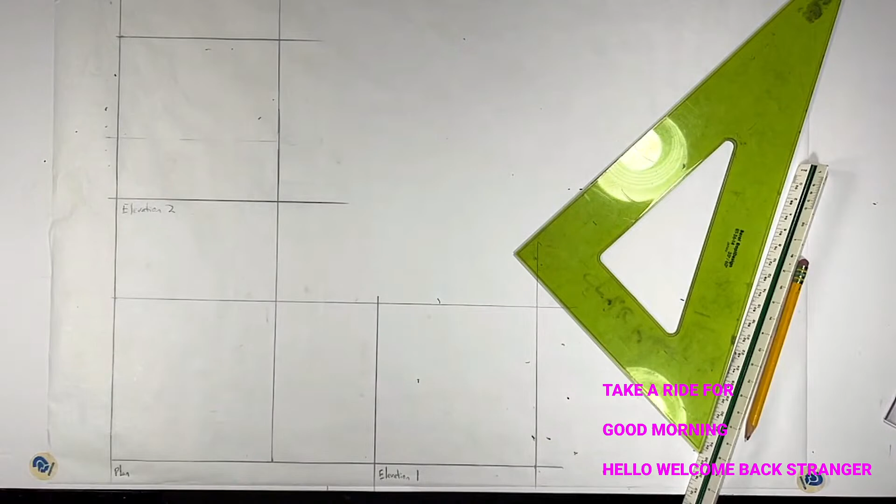So today are you giving some sort of a demo on drawings? I am, yes. Okay, and Assignment 7. We pushed it off because students would be freaking out. And probably they'll be freaking out today, but we're going to keep moving forward. So I will make clear that they're to get as far as they can on the 3D oblique drawings for next week, but we'll see how it goes.

Hello, Professor. Can I get the YouTube link? Yep, that's next. I'm gonna send it out to everybody. They can watch YouTube or they can chill and watch this, or they can watch the recording later. I think some of them are working on their models as well, and the drawings. Exactly. Okay, cool. Thank you.

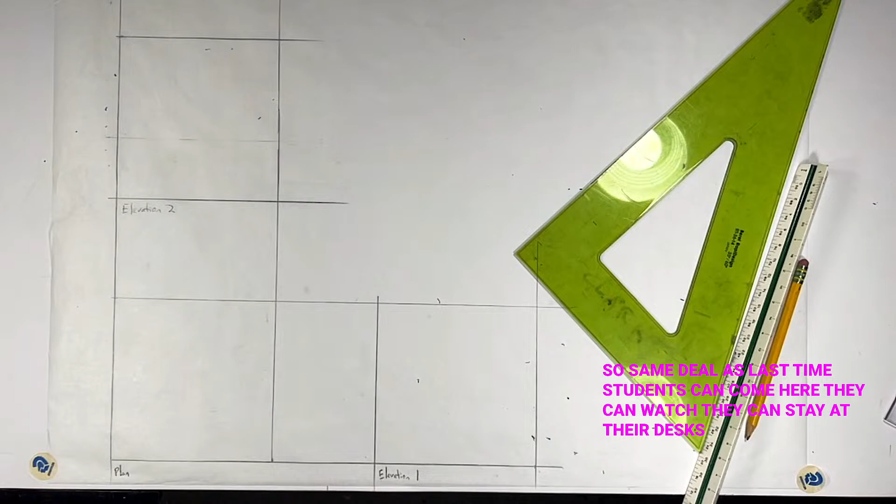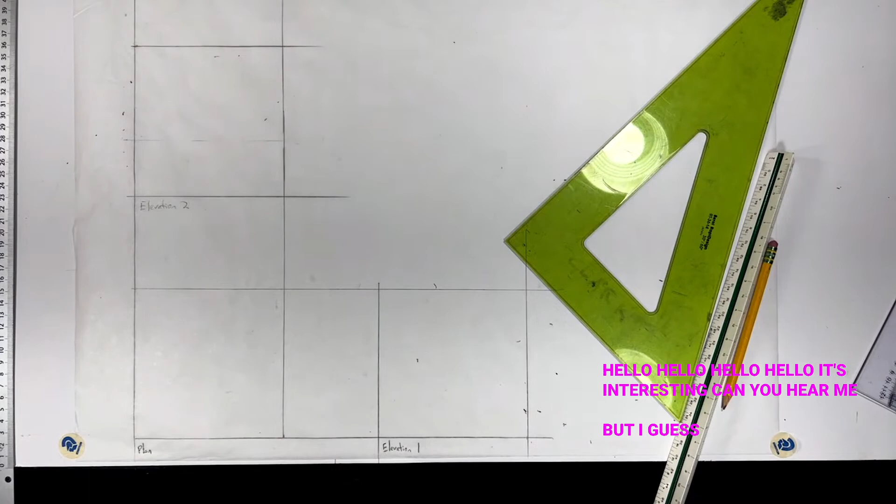Testing, testing. Hello, hello. Can you hear me? Maybe I'll get it all run as we go back. Can you hear this? Does that make sound? Hello, hello. Testing, testing. We should have sound. Yeah? Cool. Start recording. All right.

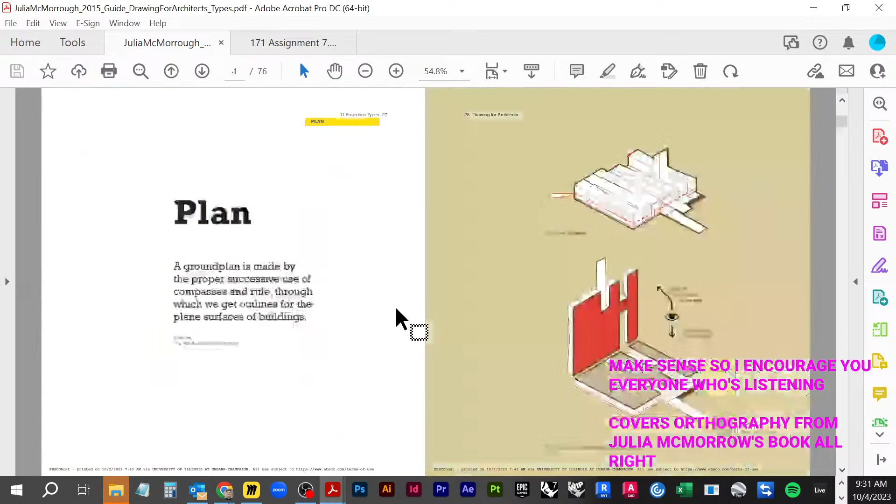It starts with plans, and she's got these beautiful diagrams that may be better than my drawings that explain this stuff. She's got examples of different types of plans, different types of sections, and then elevation, looking at the side of the building. And if you keep going, you'll hit axonometric. For assignment 7, we're going to make a 3D view. There are different types of 3D views. If you look at the assignment on the last page, Wikipedia has a beautiful diagram that explains the different types of graphical projections. This is a short list. There's many more, but these are the main ones designers and architects use.

We've already covered a bunch of these, right? First angle and third angle, like plan and elevation. We've talked about perspective a little when we were sketching. And then you've got axonometric and oblique, the ones that look 3D. These two terms are used interchangeably, depending who you talk to. A lot of people say anything that looks 3D is an axon. By definition, they're all under the parallel category of drawings, parallel versus perspective drawings. But there's a difference between axons and obliques. I usually use the terms interchangeably, and outside of this room they will be, but we should understand the difference.

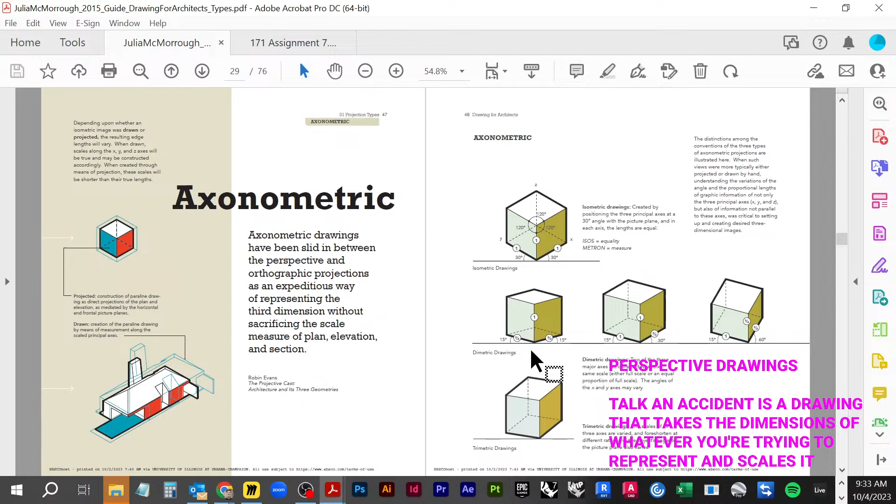An axonometric is a drawing that takes the dimensions of whatever you're representing and scales it, so we can still measure off it. That's the beauty of these drawings, just like a plan or a section, where we can measure with our ruler or our graphic scale. Can I ask someone to reach in the sharing table and give me a white triangular graphic scale ruler? Bottom left there should be a couple. But anyway, axons we can measure, and we can use the scales to get a ratio of how big things are.

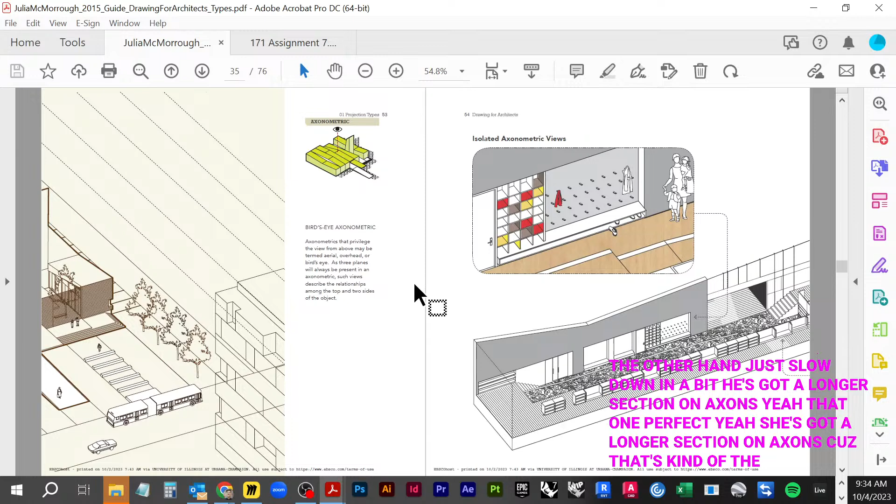Obliques, on the other hand, we'll scroll down a little. Yeah, that one. Perfect. She's got a longer section on axons because that's the terminology people normally use. But if you go down to obliques, this is actually what we're going to be drawing. The main difference is that with an oblique, we can take our plan drawing, rotate it, trace over it, and then use our elevation drawings to draw the heights. So we're going to project the height up. Axons are kind of weird.

Kind of hard to see. The top one is isometric, so that's kind of the main one we use. And I don't know if in your kit they gave you a 30-60 triangle? Probably not. I think I told you guys you only have these adjustable triangles. So with adjustable triangles, we can get 30, we can get 60, we can get all sorts of different

angles with it. But you'll see these a lot, 30-60 triangles, and the reason they exist is the 30-60 is what allows you to create an isometric drawing, right? Like kind of a standard centered isometric drawing. And this will make more sense in a second. The second line, we have dimetric drawings and then trimetric drawings.

It basically means that we can take our base drawing, or this angle we have, and we can change the angle in random ways. And there's different ratios of proportion between the x and the y of our model and the z of the height. So those things will be at different proportions depending on which face you're trying to privilege. So there's lots of reasons that you might make as a designer for choosing the angles and proportions of the 3D drawing that you do.

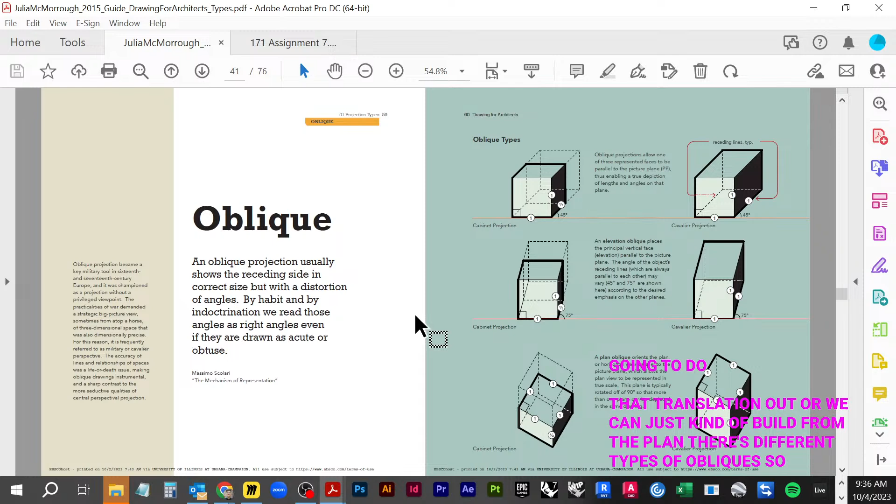We're gonna do oblique drawings, which takes a little bit of that translation out. We can just kind of build from the plan. There's different types of obliques: cabinets, cavaliers, plan obliques, section obliques. If we scroll down a little bit, Julia's wonderful book has some great examples. This is a plan oblique, so you have a plan, and then you see the lines go off at a 45 degree, the height of things.

So it's totally kind of weird to look at first, but the more you look at axons and obliques, the easier it is for you to be able to read them. The most standard one that we're going to do, and I put this diagram on our, so this one, is a 45 degree plan oblique. So we're going to take our plan, rotate it 45 degrees, and use this thing just kind of locked in this main position.

But going forward, in my third year studio, we're doing things like this, trans obliques they call it. This is a plan drawing where we see the elevation. So it's not rotated 45, it's just a straight up plan. And then we take the elevation and lay it over the top and then layer things in back. So I can only see the front of this building, I can't see the sides. So by choosing the orientation of your oblique, you can eliminate whole aspects of your project from the rendering or show lots of aspects of the rendering.

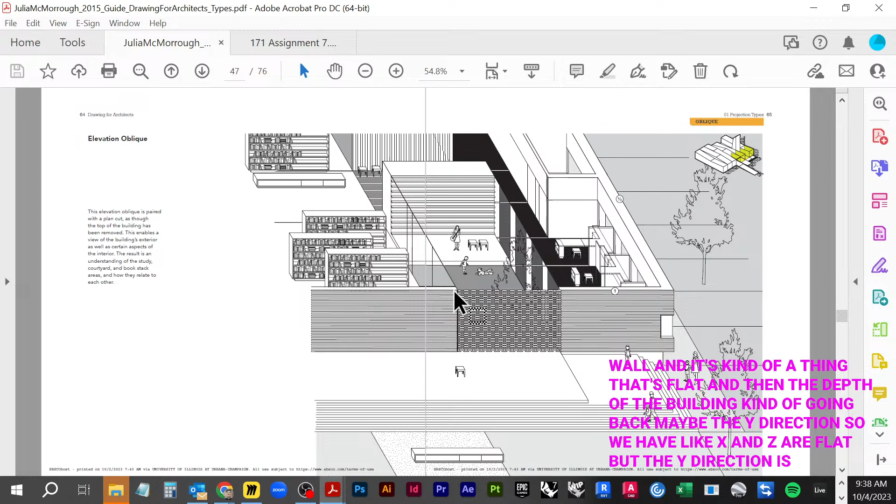This is an elevation oblique, so it's privileging this screen wall. That's the thing that's flat, and then the depth of the building going back in the Y direction. So we have X and Z flat, but the Y direction is off at an angle, as opposed to this one where the X and Y are flat, but the Z goes up at an angle. So anyway, I also left in perspective, so you can look through this chapter on perspective.

But let's talk about how to do this. I'm not going to read step by step through the instructions here; you guys can read that. I'm going to talk you through how to actually do it. The first step is the same as assignment 3 and assignment 5. You're going to take a model from your latest collection and draw a construction drawing. So we're going to take the top view, or the roof plan as we've been calling it, and every other piece of paper that we can see, and project it flat onto the paper, right? So it's kind of X-ray view.

The big difference between this and assignment 3 and 5 is we're going to do it at 1-to-1. So we're not going to double the size of things. Maybe after you try the first one, if you want to do a big axon or a big plan oblique, you can make it 2-to-1, but for the sake of time and ink and paper cost and your sanity, we're going to keep it a little bit smaller for this one.

So if you're smart, you'll figure out you can just measure real quick and lay it out. I'm not going to measure every single one, but this is where you would get your ruler out and measure the piece of paper. And go back to this thing. So you measured it, we're going to do your projection.

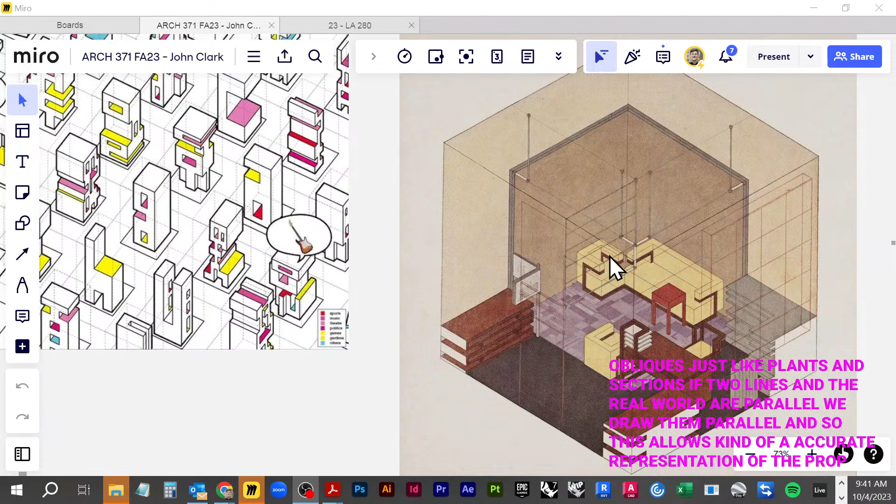All the lines are parallel, and this is really easy to see, right? On obliques, just like plans and sections, if two lines in the real world are parallel, we draw them parallel. And so this allows an accurate representation of the proportions of things to other things. This one has got some basic textures. It's heavy on the color, but what I'm asking you to do with the plans and sections, where we add texture onto different surfaces, you're going to do the same thing in 3D once we get there.

Anyway, I've got a bunch of these. People like to sketch in axon or in oblique quite a bit. It's a great habit to get into, I think, to learn to see the world as little axonometric sketches, because you can describe three surfaces or a lot of surfaces really quickly. And even people who aren't trained as architects can still read a drawing like this, maybe.

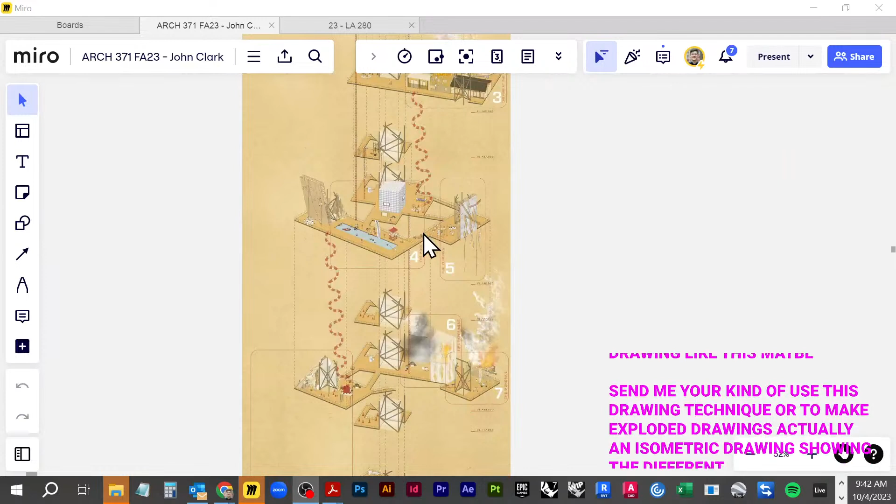Often you'll use this drawing technique to make exploded drawings. So this would be an exploded, actually an isometric drawing, showing the different parts of this construction exploded up with little dotted lines that show how they're connected. And this one has little words. I don't remember what this was, but it's a long banner, a really big one.

We will get into the computer and start to think about how to make digital axonometrics, à la this one, which maybe show a landscape or a city or a world that keeps going. One way to say it is a bird's eye view, but again, everything is parallel. Birds have eyes just like humans, so birds see in perspective. So the big thing is to understand we're not drawing perspective. Nothing converges. This is an abstraction of our lived reality. It's like if we were on a space station with a long telephoto lens, almost eliminating perspective and zooming in on a city or something.

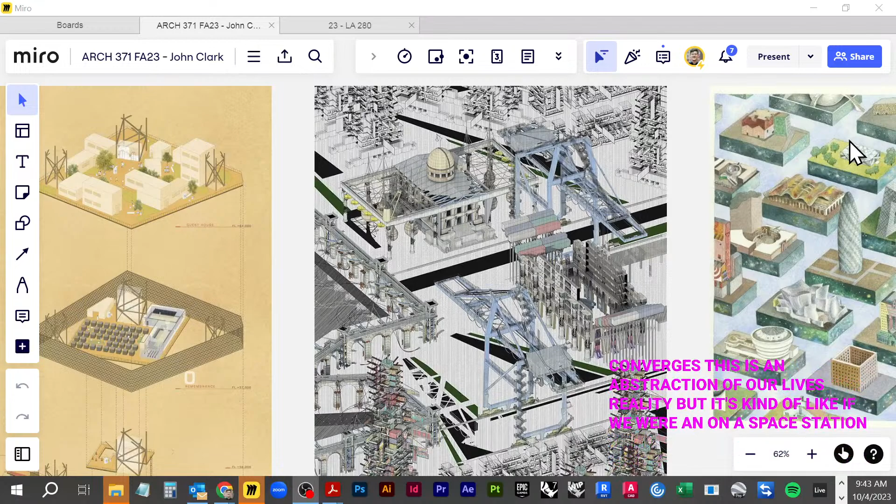Another famous axon by Madelon Vriesendorp. She's an artist who partners with Rem Koolhaas of OMA, and she did a lot of the paintings and images that made their firm really famous. This is City of the Captive Globe, this little allegory of different architectures from around the world in this ideal city. Anyway, I've got a ton of these. We can look at them all day. I will post these up, maybe in Google Drive, and take a look.

I'm gonna get going on this. Okay, so step one is to measure your paper and translate it onto the paper, one-to-one. This model I made, I have a different grid, kind of messed up the grid a little bit. So you're gonna want to choose which way you're gonna look at the drawing at the end. I have it set up where you have a plan and then two elevations. So that way you can project one elevation, and then project the other elevation right above it. You could draw four elevations and then choose, but I would say spin the model around and pick a view.

Kind of what we're doing is we're rotating 45 degrees up from the corner and like 45 degrees from straight. And you can kind of see if you rotate it around, some views are going to be more interesting, or some views are going to show more information. Other views won't. This one, I can see into this little square. I can kind of see these layers kind of going up behind.

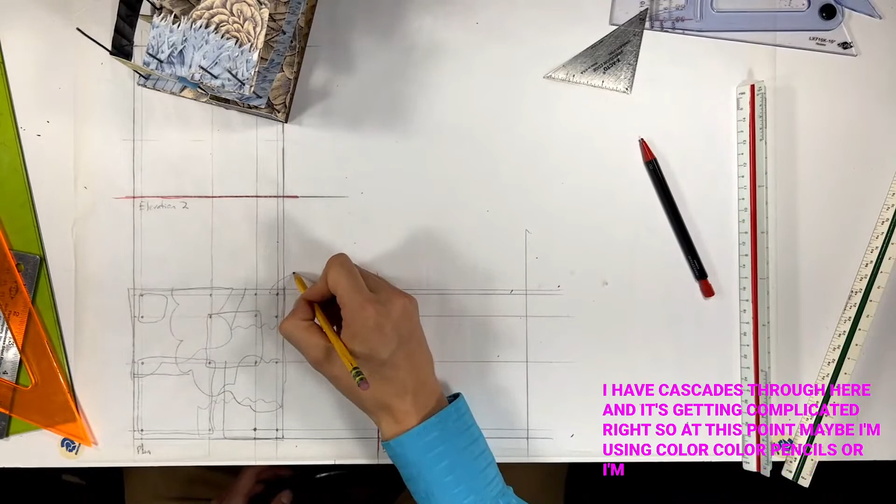This flower kind of cascades through here. And it's getting complicated, right? So at this point, maybe I'm using color pencils, or I'm saying 1, 2, 3, like making yourself some sort of notations. There's another box down here. There is another flower. And the base part, these couple of pieces of paper down here, I'm not going to worry about just yet. Okay, so I did that in a couple minutes.

You might take a few more minutes to measure it and be accurate. Same rules apply. Be as accurate as you can. The more accurate you are, the better the drawing, the better your skills of translating the 3D world into the 2D world. That will serve you well in the future. But don't kill yourself. At some point, you need to finish the drawing. So 100% perfection is not going to be the way to do it. 100% perfection means you'll be here forever.

Okay, so I'm going to draw. I've got my plan, and I'm going to draw the elevation. So looking at this side, kind of projected down. I could use the same trick where I have a T-square and my lines that I can project, little pieces of information, but I'm just gonna freestyle it. Got flower, I've got box, and maybe I should measure a few of these. It's pretty good.

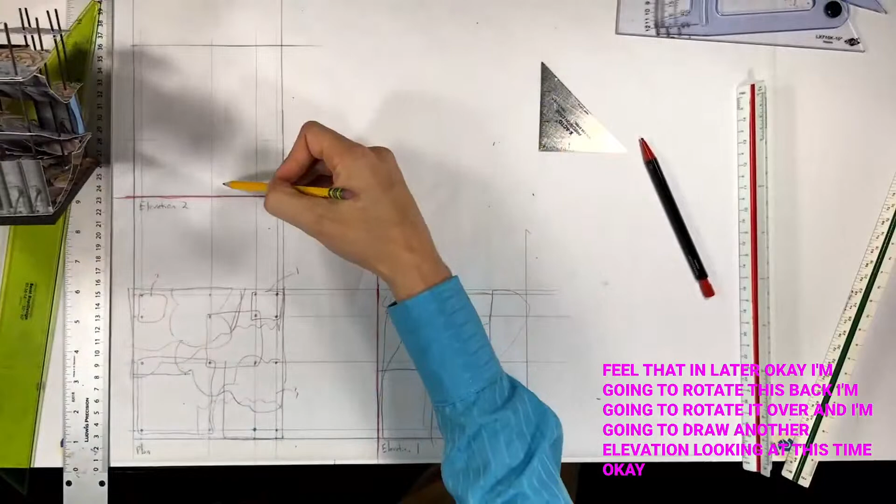There's a wall, there is a box, let's measure it, like 1.25 inches. There's another wall, or a floor here, there's another one here, there's some other walls, and a box, and another little box. Okay, again, did it in a minute. You'll take a few more to get that done. Okay, so I've got, let's call it a construction, X-ray, one-to-one drawings, like orthographic drawings.

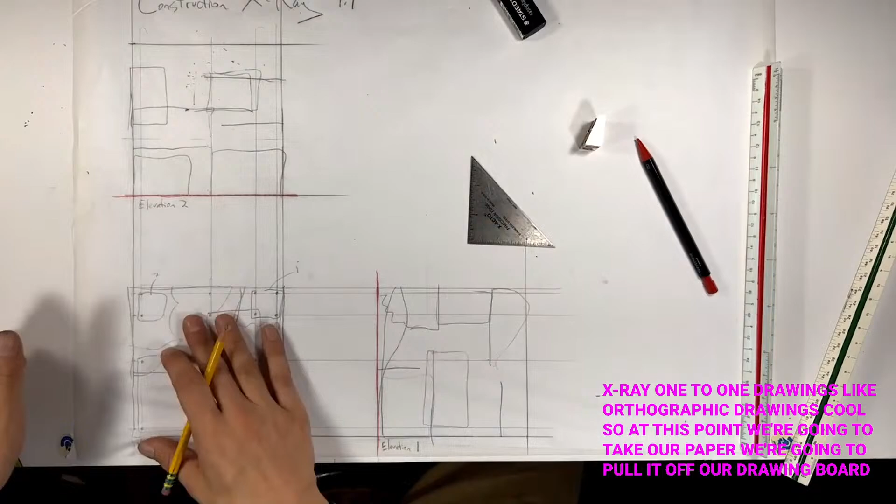Cool? So at this point, we're gonna take our paper, we're gonna pull it off our drawing board. And this is a bit long. Rotate it. Okay. So I've got my drawing taped flush to the edge of my table. I'm gonna take my T-square and my 45 adjustable triangle and lay my drawing underneath it. I'm gonna try to get my plan oriented corner to corner at a 45-degree angle. So one way to do it is just take your T-square and rotate the drawing underneath it.

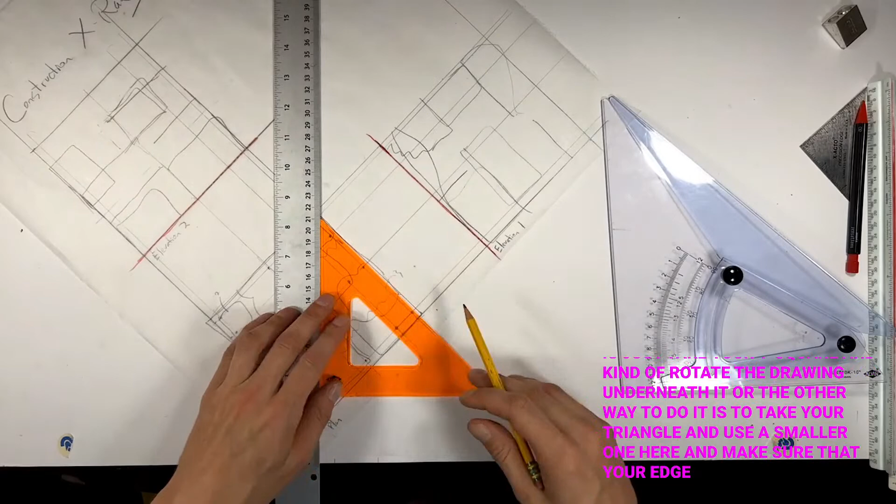Or the other way to do it is to take your triangle, I'm going to use a smaller one here, and make sure that your edge is along your 45. So take your time, get it set up. Pretty close. And then tape it down. Dots. Lots of tape. Okay, so I'm gonna double check after. Yeah, question? Oh yeah, sorry.

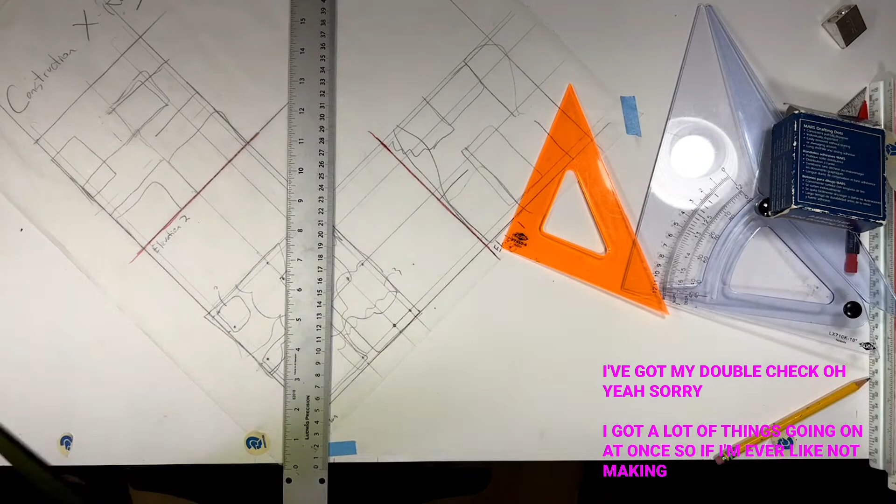I got a lot of things going on at once, so if I'm ever not making sense or something's clearly wrong, let me know. Thank you.

Okay, so we double check it. We've got your T-square flush with the edge. We've got your triangle. You can double check. Looking good. We're at 45. The first one you do, make it 45. The second one you do, if you do another one of these or you're feeling into it, change it. If you rotate it a different angle, you'll get a different result.

So rather than looking equally at the two faces and the top, which is what I'm going to see, maybe this side is more important or more interesting, so I can rotate it a little bit more that way. So this side is shallower, this side is bigger, right? Or it takes up more square footage within my drawing.

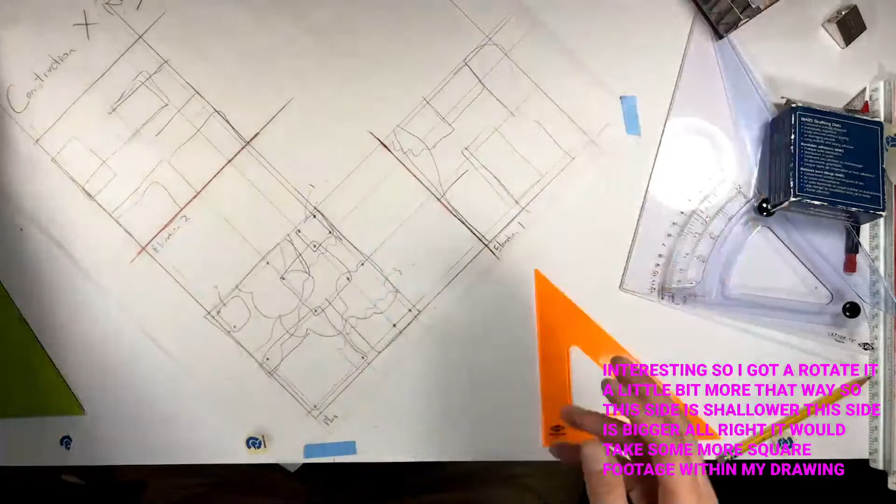Okay, take a fresh sheet of trace paper. I would lay it so it's flush with the edge of your drawing table. If anyone is making these drawings and they're finding that their desk is janky and their cutting board ain't cutting it, and I know those little Masonite boards we had you guys buy, probably not the best.

There are drafting boards over there on the cutting table. Get yourself some, or borrow one while you're working on this. Or move to a different desk if your desk is too crowded or not flat. What I'm doing here, putting a piece of mat board down below, also works.

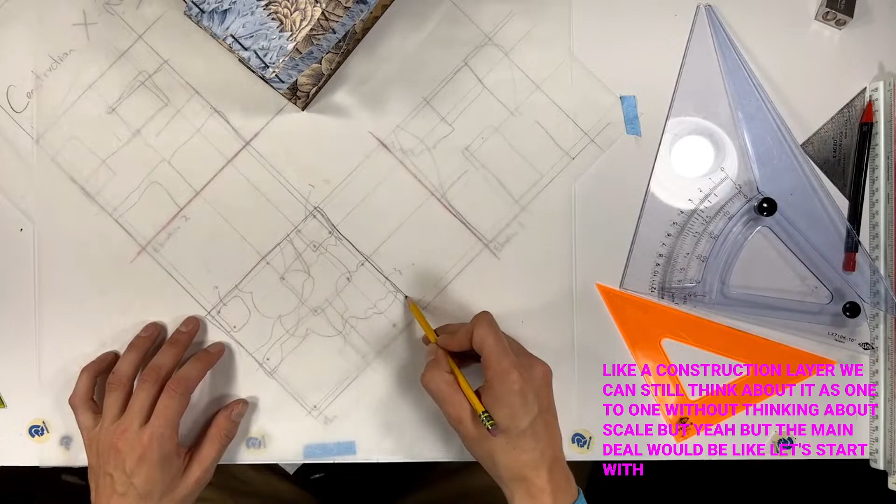Okay, so I'm gonna do this sort of quickly, just the first layer, and then we'll do another layer that'll be the inked, more careful final one. So this is again still a construction layer. We can still think about it as one-to-one without thinking about scale quite yet. But the main deal would be, let's start with our box, our base, and maybe we can start with the wires.

I've got, say, a wire here. I know how the wires are. Let's go X on one side, Y on the other, and then the wire is 5 inches, right? So I can draw a line from that wire straight up. So up 5 inches, that is the Z. You see that? It's X, Y, and Z. And those are the orientations. So Y is all that way, X is all that way, Z is always up, straight up that way.

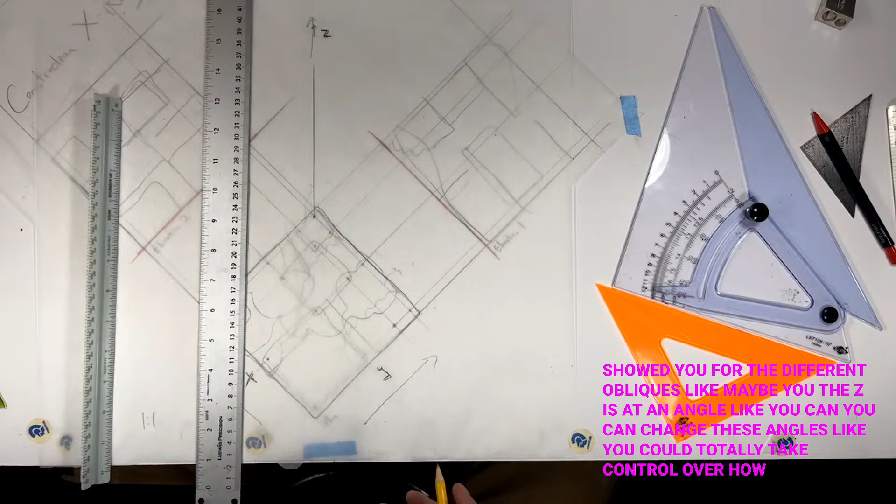And again, some of the examples that I showed you for the different obliques, maybe the Z is at an angle. You could change these angles. You could totally take control over how the geometry projects. But the main idea is to be consistent, because even if I rotated the Z off at some funny angle, as I move this around, I would keep that same angle, so my Z's are always parallel. Remember, parallel drawings, no perspective.

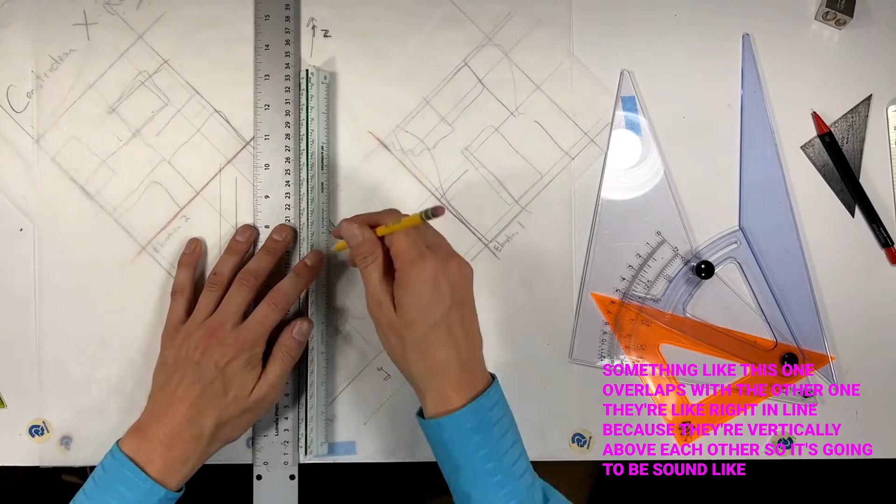Okay, so I'm gonna run through it. I'm just gonna really quickly pop some 5-inch wires on these. I'm just double checking that my T-square is flat. And we'll start to notice something: this one overlaps with the other one. They're right in line because they're vertically above each other. So there's gonna be some lines that are in plane with each other or in the same place. Make some little ticks or do them just off so that you can see.

Yeah, mechanical pencils walked away, so I'm using this guy.

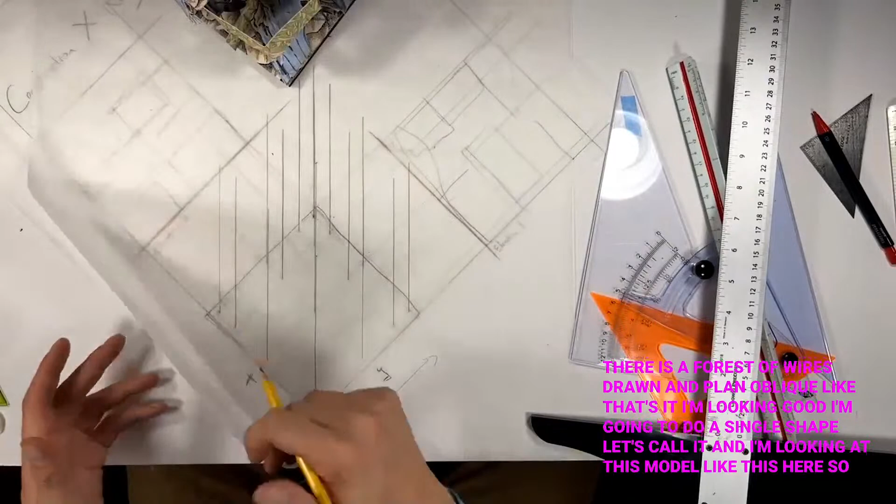Okay, there is a forest of wires drawn in plan oblique. That's it. They're looking good. I'm gonna do a single shape. I'm looking at this model like this here. So let's do, say, this leaf up top, which if I trace it, is this thing. It's relatively flat. It has a little bit of curvature as it kind of goes up.

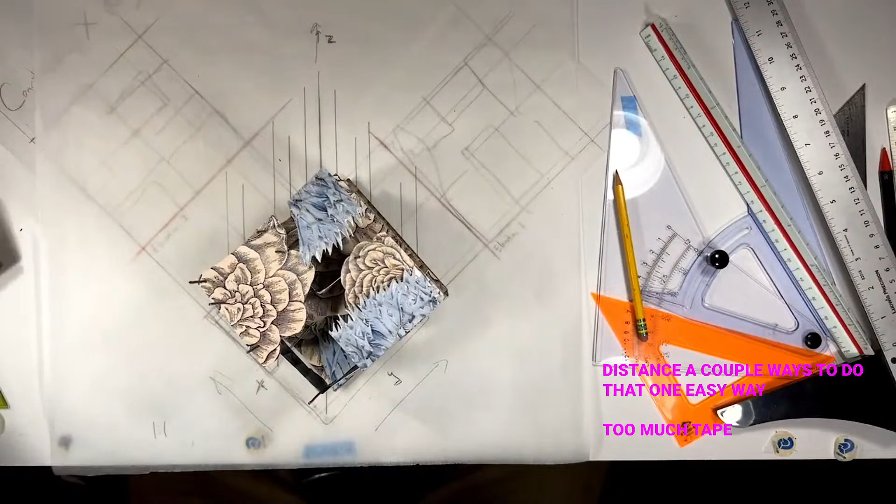So what I want to do is take that red shape and move it up, so in the Z direction, whatever distance. A couple ways to do that. One easy way, so we're using too much tape. So I can measure how high it is off the base. It is, let's call it 3 3/4.

So I can measure, say, off my wire, which starts here at the base and goes up 3 3/4. Make a little tick mark. I could take this shape and kind of eyeball it in up here, or if I'm smart, move my top drawing down so that that tick mark is where the wire is and trace that shape in plan. Do it in red.

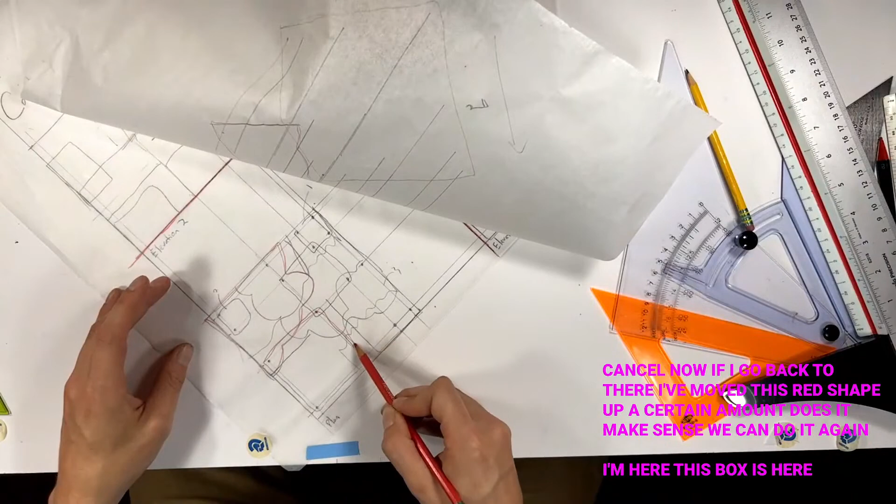Okay, so now if I go back to there, I've moved this red shape up a certain amount. Does that make sense? We can do it again. Let's do this box right here. So this box is here in plan. I'm gonna do, say, the top of the box, because that's what I'm gonna see for the most part. So I can measure how high it is off my ground. 2.5, let's say. So I know it touches this front wire, so I'm gonna measure on that wire. 2.5, make a little tick mark.

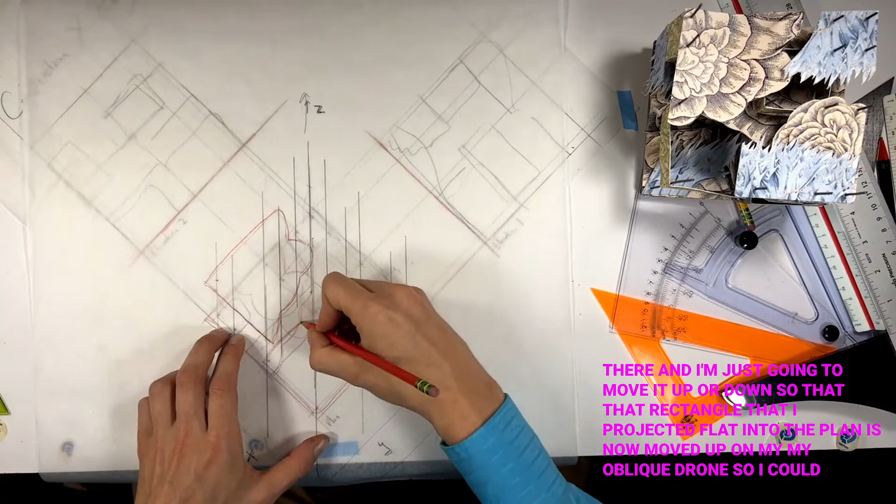So here, my outline of my base is overlapped with the outline of my base, right there. And I'm just gonna move it up or down so that that rectangle that I projected flat into the plan is now moved up on my oblique drawing. So I could do that, and then move back. Let's put a piece of paper under so it's easier to see. So that is the top of this shape that I just drew.

There's a thickness to that shape, so I can measure the thickness, 1.25 inches. And again, I can measure off a plan oblique. So I could use a ruler to show the thickness of this stuff. 1.25 inches, 1.25 inches, 1.25 inches. And I'm gonna see the front aspect of this box. Look at that. And I'm gonna see the inside of it, 1.25 inches. There. And so this is just a piece of paper drawn in 3D. I would see maybe a dotted line of how it kind of goes behind the other one eventually, right?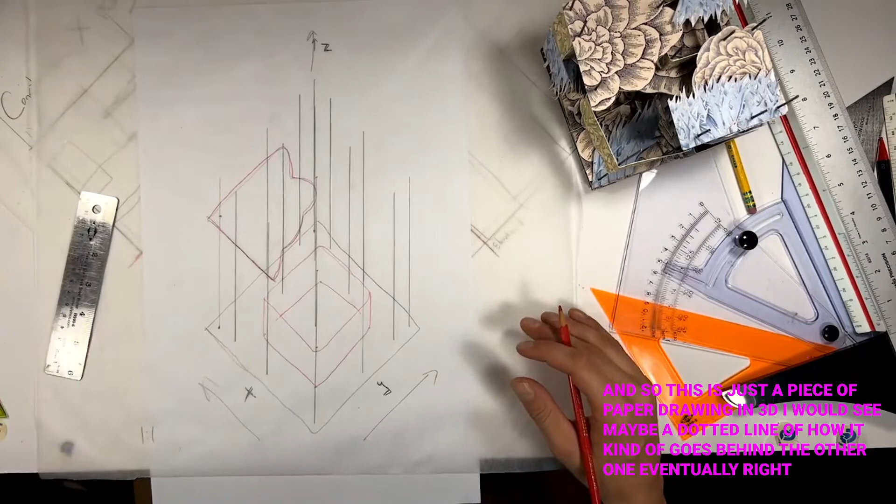Does that make sense? So there's this vertical space in between the bottom of this wire and the bottom of this paper. Vertical space in between the bottom of the wire and the bottom of the paper.

Making sense? I can't see you guys. The lights are in my eyes. You can see whether your eyes are wide or not.

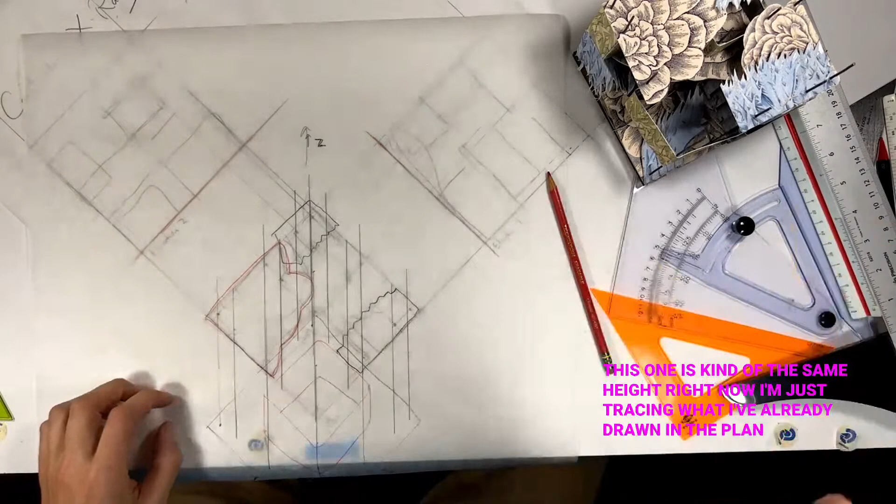Okay, so I'm going to repeat the process. Take this off. I'm going to kind of eyeball some of these in based off the same height. So I got these two zigzaggy papers. It's kind of a little bit higher than that one. This one is kind of the same height. So right now I'm just tracing what I've already drawn in the plan. I'm not making it very fern-like, but it's all good. What else? There's another box here.

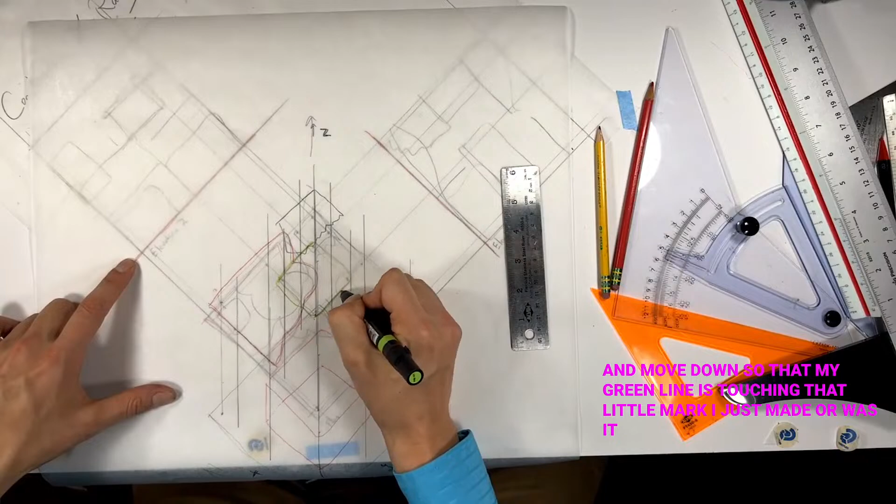So that box is sitting, let's measure it, three inches above. So this box, and again, if I'm getting confused, let's do color. What I say, 3 inches, so we can measure, find some wire. This is why wires are nice. We can kind of use them as registration marks. So I know this wire, I'm going to go up 3 inches. So there. I can move down so that my green line is touching that little mark I just made. Where was it? There it is.

Has some thickness to it, so I'm going to see the thickness. We've got this wall, so I see this wall. And this is a great example. It touches the edge. So right here, it touches, and then it goes up a certain height. So it goes up 1.5 inches. I could use my T-square, and I could measure up 1.5 inches. I'm just gonna eyeball it. This wall is an L shape. It curves in, so it wants to curve in up to where it is in plan.

I've already drawn it. We have another wall over here, which is this one. So it goes up a certain height, it goes over. We've got this box on the back side that's underneath this piece of paper, so I can just go down from the top. Goes down 1.5 inches. So it goes down from this red piece of paper and it goes over. And I want this line to be parallel to that line, but it only goes over 1 inch. I went too far. It's a box, so you can draw the whole thing in there.

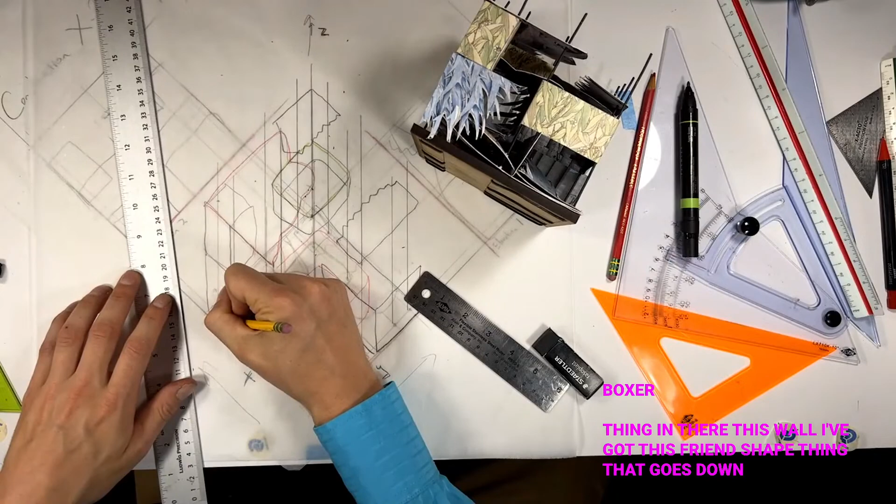This wall, I've got this fern-shaped thing that goes down underneath there. And I've got some of these sloping things that I see on this side. So just do it there and there. And these cut back somewhere. And I've got one more kind of flower or fern that is sitting in between these walls. So at a certain point, you kind of use your geometry to locate some maybe more complicated pieces of paper. This other fern sits in between, let's say it's half an inch above this wall, and it does its fern thing, kind of cuts away. There's a flower under there too.

Okay, so I got a lot of stuff on here. Right now it's kind of a hot mess. It's like a lot of lines, kind of all overlaid. I maybe have an idea in my head. Maybe at this point I'm referencing my notes, you know, like number 2 there.

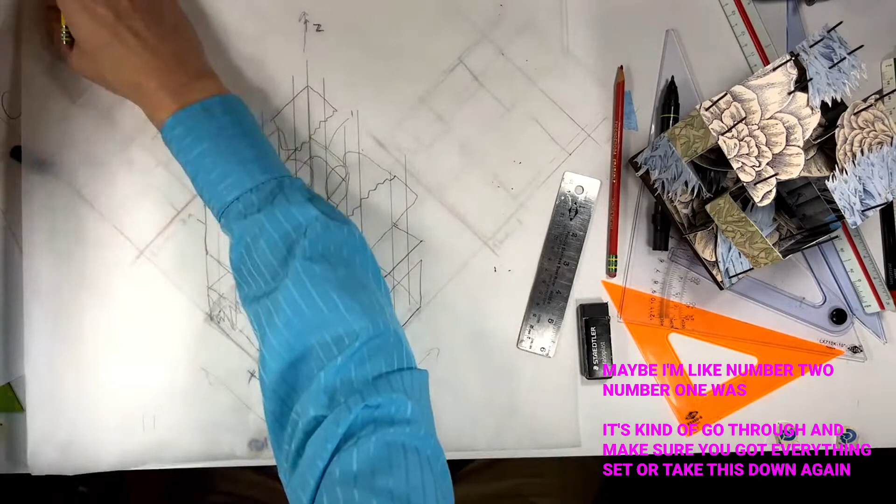Number 1 was this one. Just kind of go through and make sure you've got everything set. Or I'm gonna tape this down again. We can take a fresh sheet of paper and just do a cleaner version.

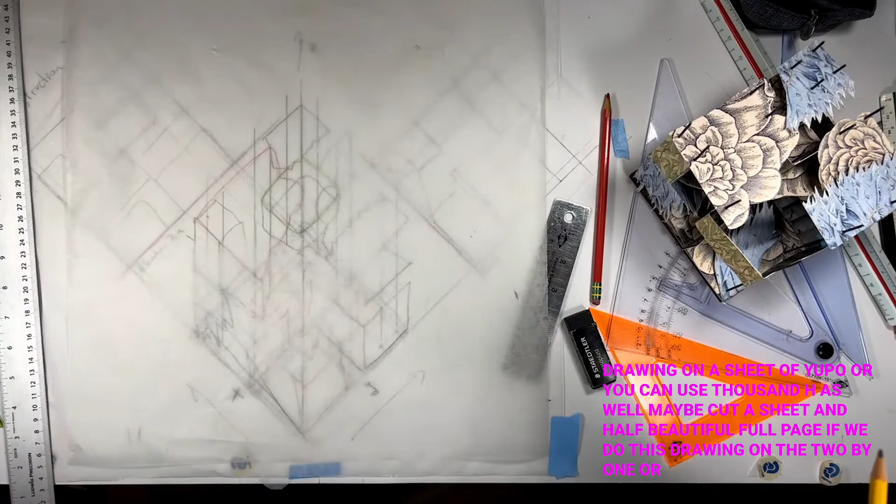Okay. Again, first one you do maybe use trace paper. I've sized this so it works on Yupo. You can fit this drawing on a sheet of Yupo, or you can use 1000H as well. Maybe cut a sheet in half. You won't need a full page. If we do this drawing on the 2:1 ratio that we've been doing the other ones, it'll take the full 17 by 22 sheet, maybe a little bit more than that.

So if we make them isometrics and kind of squish the angle a little bit, then we can fit it on a big one. But I'm not into torturing you guys, so we're gonna keep it small here. Cool. Let's get some more tape. You may think I'm into torturing you, but I'm really not.

This is a drawing type that was really popular in the 80s and 90s, and kind of went out of fashion for a little bit once computers came along. A lot of animations and hyper-realistic renderings and all that sort of stuff. But then the neo-postmodernists came along in the 2000s, like where I went to school at UIC. We started to make these again, and some of my older colleagues, Steve Wierzbowski at Trust Outfit, he's like, "You're doing axons? That's so old. That's such an old thing."

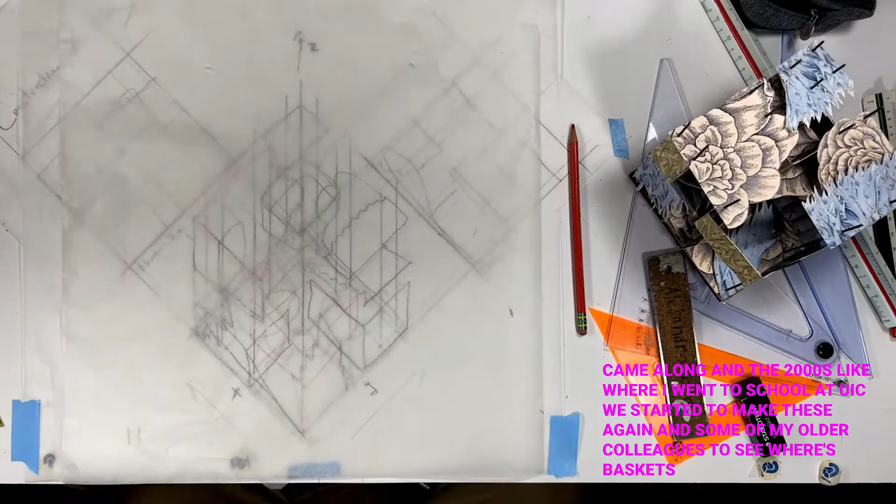So what's old becomes new, and this sort of drawing type, we're starting to see it pop up everywhere again. And I think that's not just because of style, but because it's actually really useful.

Okay, so on the fresh sheet, now what I'm going to do is try to draw these 3 faces. So 1, 2, 3. Where's the wire? 1, 2, 3, right? Top, sides. We are going to draw what we see first, and not draw the things that are behind. And we're going to start to think about thickening this geometry. So same way we did for the plans and sections.

A piece of paper is not a piece of paper. A piece of paper is like steel or concrete or board form, or wood, logs or wires that are wrapped around, or a photograph of a flower that's been imprinted into rammed earth, like literally anything. Looking through all the precedents, and through talking with us, we can help you figure out

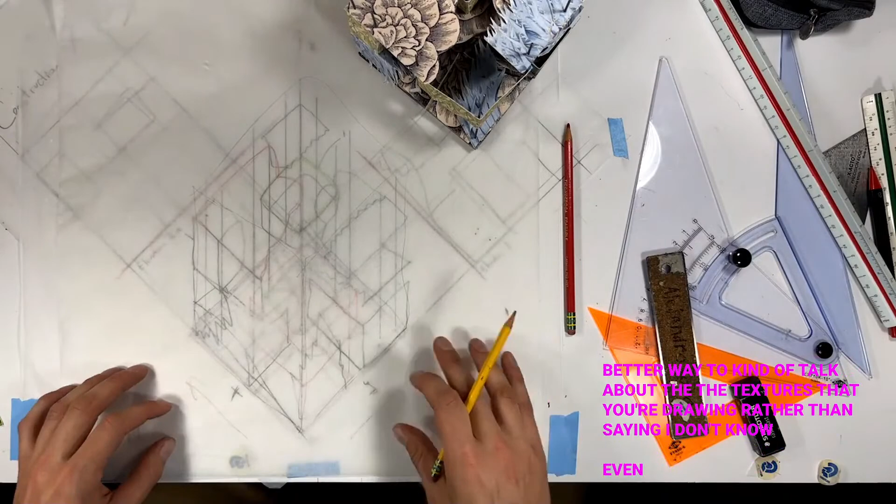material knowledge, let's say, or understand a better way to talk about the textures that you're drawing, rather than saying it's just lines or just dots. You should say it's concrete or it's wood or whatever. Use the language of architecture, even if you're not 100% sure what it is. Cool. So I'm going to start again at the top and work down.

We'll start with the first flower I did. You see most of it. That has a thickness, so I'm gonna draw a line down. I'm gonna draw the edge. At this point, we can bust out your scale again, and you can choose a scale and think about how big the people are gonna be next to your little drawing. I think 1/8 inch is great. If you guys use 1/8 inch, then the people are about yay big, sitting on there.

That's pretty cool. Half that size, so this is 1/8 inch equals 1 foot 0 inches. Chubby guy. That's 1/16 inch equals 1 foot 0 inches. Or double 1/8 to 1/4. I think 1/4 is too big. Pick one of these two. That way your little people can

inhabit your little space. So at this point, also, if you haven't started playing with these little people, you should. So that's 16th. This would be 1/8. I digress.

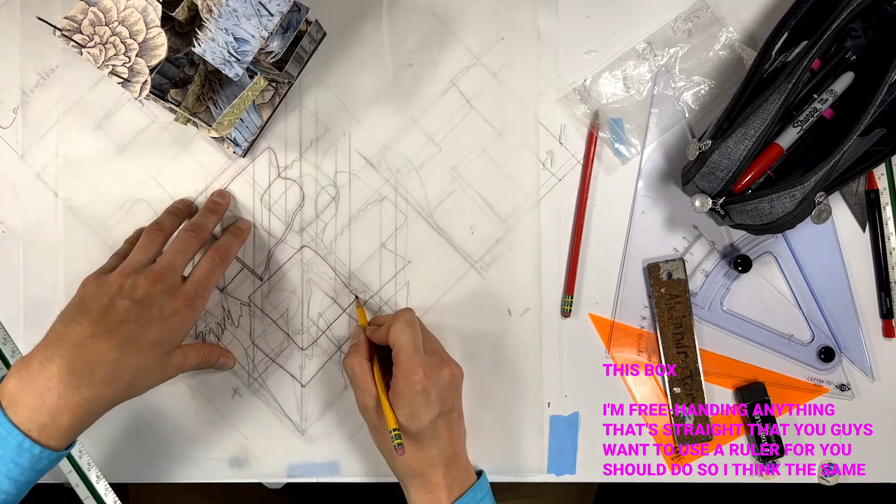I'm freehanding anything that's straight. If you guys want to use a ruler, you should do so. I think the same rules apply. A combination of ruled and freehand makes for beautiful drawings. This is this paper that kind of folds over. This is this next one.

This one, I see the bottom. I see this top guy. Put that here.

So this one kind of goes down below. I'm doing the wires last, you notice? You guys ever just doodle drop shadows onto things in your notebooks and stuff? That's basically what we're doing here. Kind of front, you want to add a drop shadow.

That's another flower. This flower is kind of facing away, so I don't see too much of the front of it or the thickness of it. I see this box kind of emerging underneath these pieces of paper. There's another flower actually that kind of goes over the front. So I would erase some of this.

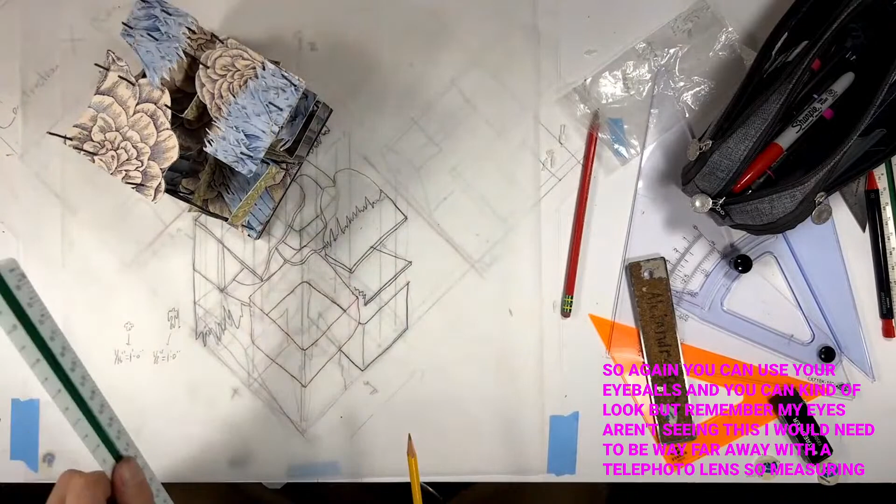See some other flowers. So again, you can use your eyeballs and you can kind of look, but remember, my eyes aren't seeing this. I would need to be way far away with a telephoto lens. So measuring and trusting the projection process that I did in the previous step, that's the way to be accurate. Using your eyeballs is a way to be expeditious with time.

Got this wall. It sort of pops through. This other wall has a thickness to it. We've got this fern thing that kind of pops through. We've got these pieces that kind of slice through the wall.

And that's kind of it. It's like what I can see. All the stuff that you guys are looking at on the backside, I can't see. So I'm not going to draw it. I could later. I could draw in like dotted lines for all this stuff, but let's just ignore it for now.

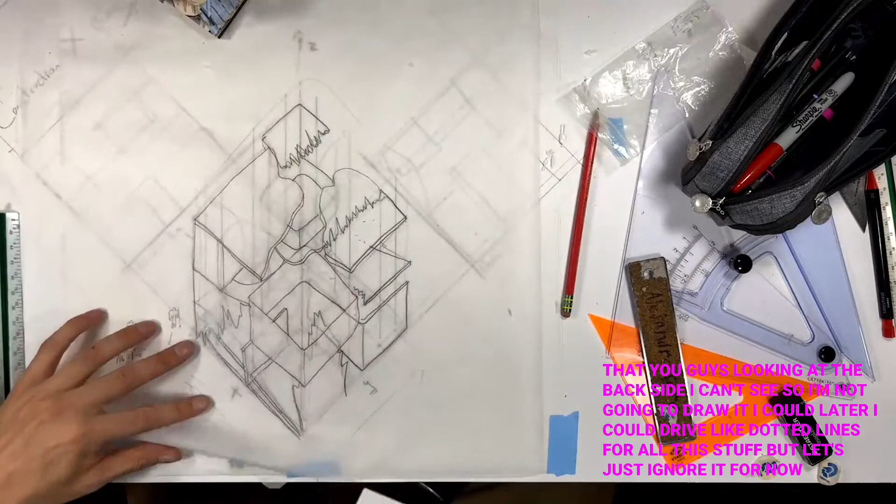Cool. So I got like the start of a 3D drawing without thinking too hard. I thought a little bit, but not too much. Trusted the process, trusted the projection. It's the same as plans and elevations and sections, just with three axes rather than two. So X, Y, and Z going up.

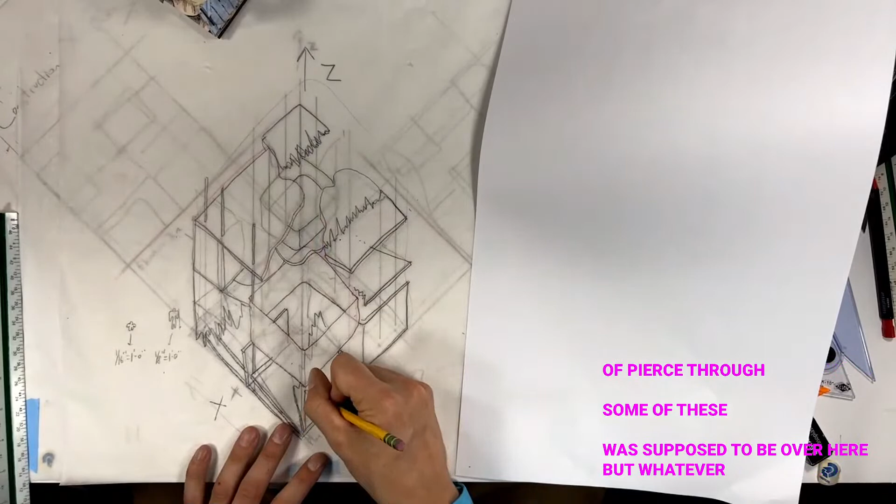Okay, so at this point, maybe I start to draw on the wires. They are sticking up. They kind of pierce through some of these. Messed up. This wall is supposed to be over here, but whatever. Forward. So drawing the little circle for the top of the wires will help differentiate them from all the other lines that are happening at this point.

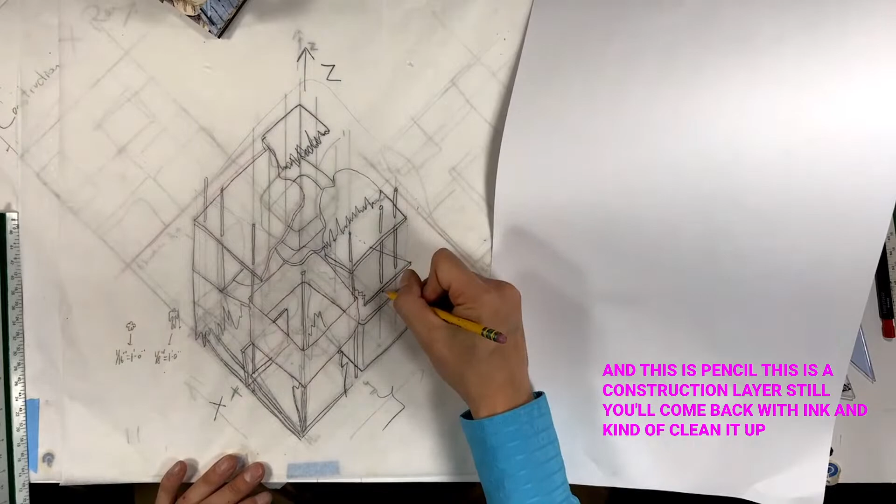Again, this is pencil, this is a construction layer still. You'll come back with ink and kind of clean it up. That one goes behind the paper. Circles for all the ones I'm trying to do here. This one actually curves up. I didn't draw the curve.

So that'll mean the wires have different depths. This one goes behind. These guys are all kind of equal. This one goes to there. Cool. Got some wires in there. I think a few more of these I would see popping through. Actually, some surfaces that I can see through there.

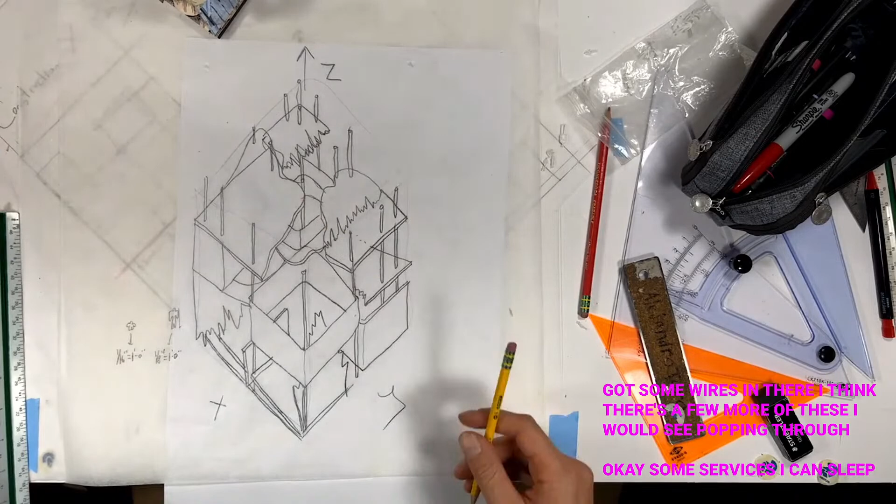So this is a one-to-one kind of translation. I'm starting to think about scale. This is where maybe we take another sheet and start to think about design. So like we've done with the plans and sections, changing it. So maybe this whole thing becomes a glass roof for whatever reason. And imagine that people go in there, or this box that I have there, I cut some archway windows.

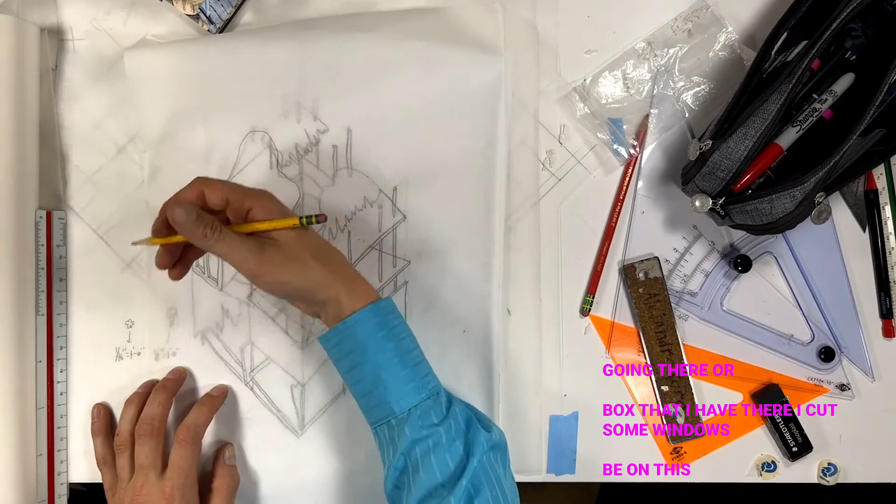Maybe on this flower ramp that goes up, I have some little tiny benches that are fern shaped. You know, adding stuff in like we've been doing for the plans and sections. Maybe between these two, again, glass, I mean, glazing walls are nice, easy things to do. This is getting dull. Because that still allows us to see through it, but adding in surfaces that don't exist in paper. We can invent as we do this.

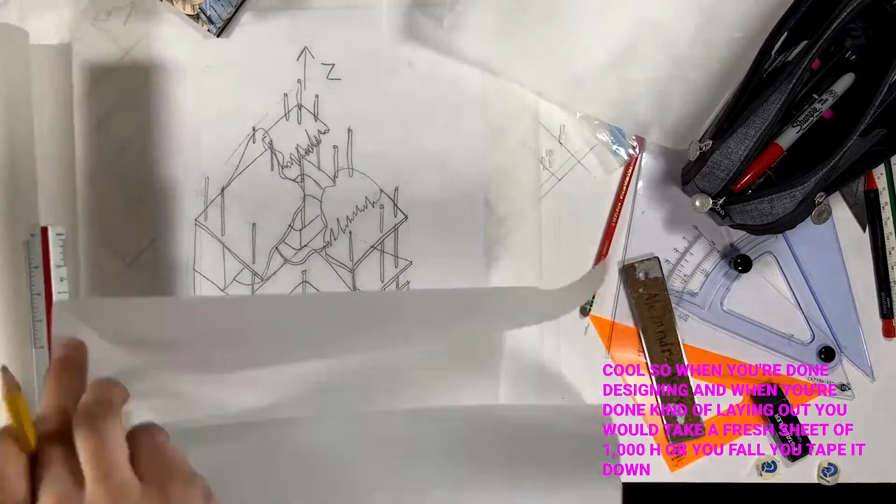Cool? So when you're done designing and when you're done laying out, you would take a fresh sheet of 1000H or UPA, tape it down and you do the inking. Same rules. There's a few other things that you might want to think about with the Axon that are a little bit different. So I won't sit here and ink the whole thing. You guys can go back to your desk and keep working. I'll finish it this evening or tomorrow or something. Then post it.

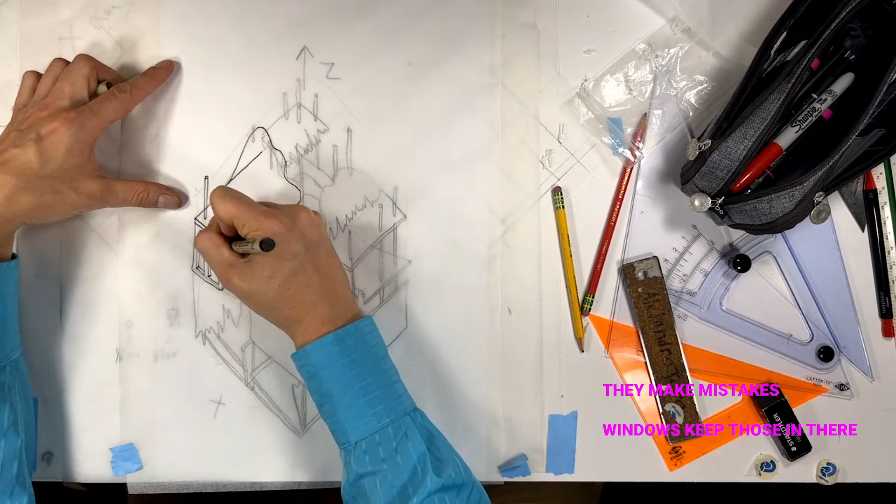I made mistakes. Like those arch windows, keep those in there. I'm just drawing with a 0.5, adding in thickness. Trying to get enough in here that I can talk about some 3D line type considerations.

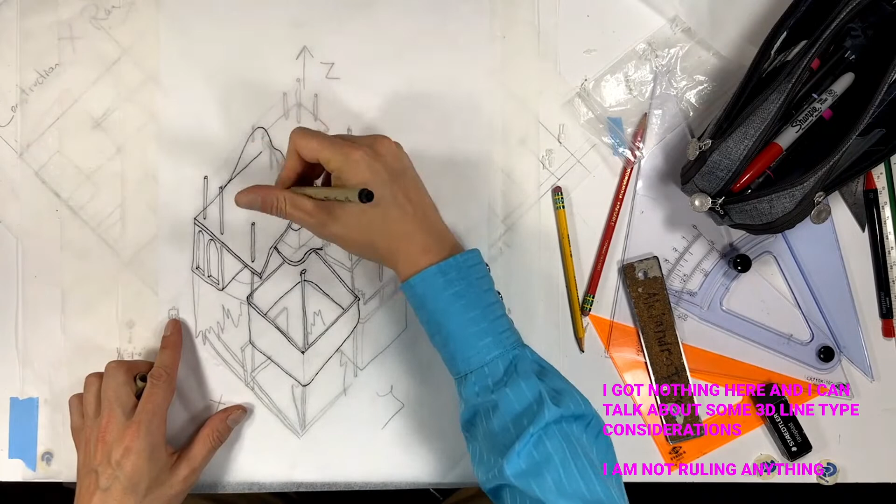Yeah, I'm not ruling anything. You guys should rule some of these. Don't make the whole thing freestyle.

All right, get in there. Wire that comes down.

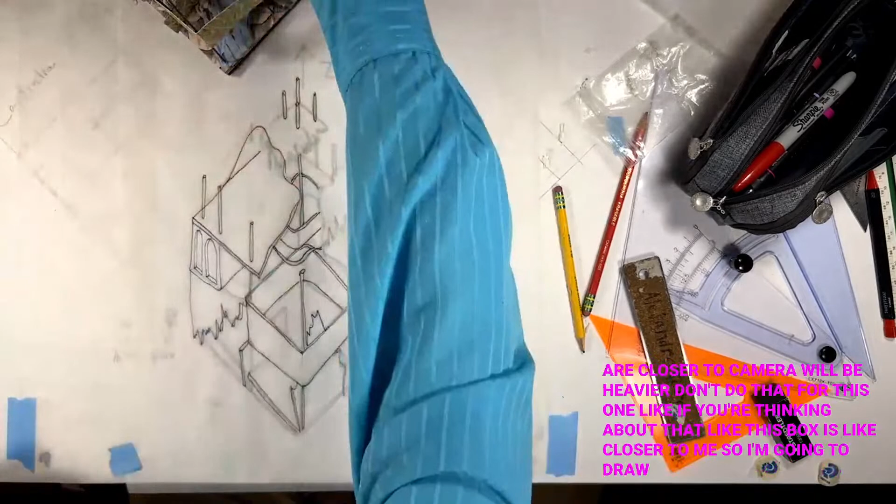Okay, so we've been spending a lot of time, especially in the plans and sections, talking about when you draw things that are far away, we're imagining that there's fog, right? And that they would be lighter, and that things that are closer to the camera would be heavier. Don't do that for this one. If you're thinking like this box is closer to me, so I'm gonna draw that really heavy, and this thing is farther away, I draw that lighter, it's just gonna start to look weird.

What you should more so think about is trying to define air or space that is in between things with graphic edges, with silhouettes. So basically having a little bit different line weights to accentuate. So here there's like air underneath this. So I want to accentuate that all of these three things are together. So I might outline

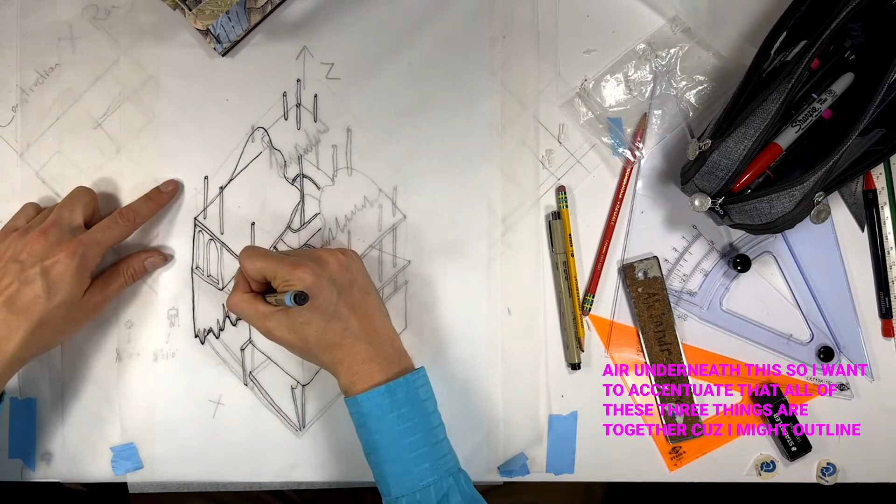and it kind of cuts back in there. Bottom of this, and then around the top. And maybe even going over these wires. And maybe these windows get a little bit of... So you can see how that kind of pops this collection of shapes which are touching each other away from, let's say, these guys on the ground.

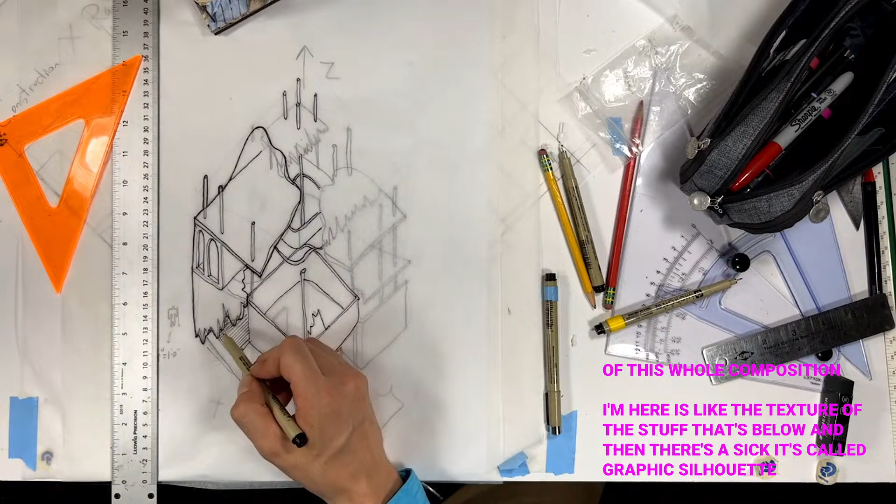And maybe I put a little texture with the thinner. Let's do it right. Emphasizing the 45 will emphasize the obliqueness of this whole composition. Whatever I'm drawing here is like the texture of the stuff that's below. And then there's this thick, let's call it graphic silhouette that separates that from this, which allows me to read it as being distinctly removed.

Maybe there's some kind of speckled texture on there. This guy curves up, so I can think about drawing maybe some contour lines. Contour lines like topographic lines, so imagining slicing vertically through this thing to show that it's not flat. So having these thin curvy lines perhaps, or in this case it's relatively straight, that track along the surface to explain its change. That'll make more sense once we get in the computer for sure.

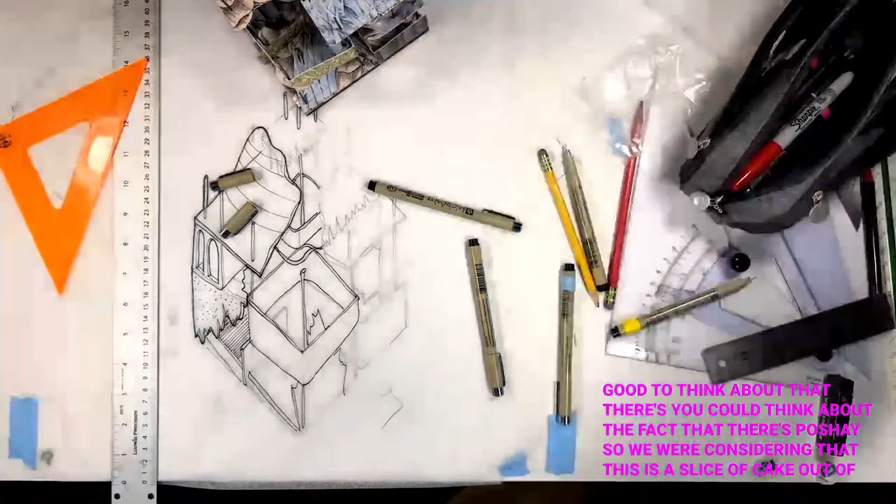You could think about the fact that there's poché. So we were considering that this is a slice of cake out of a larger sheet pan of design, a larger casserole dish, and we're just taking a little piece of it. So this piece of paper, for example, is maybe sliced. So maybe I come in with my thicker line weight. And a bit of poché.

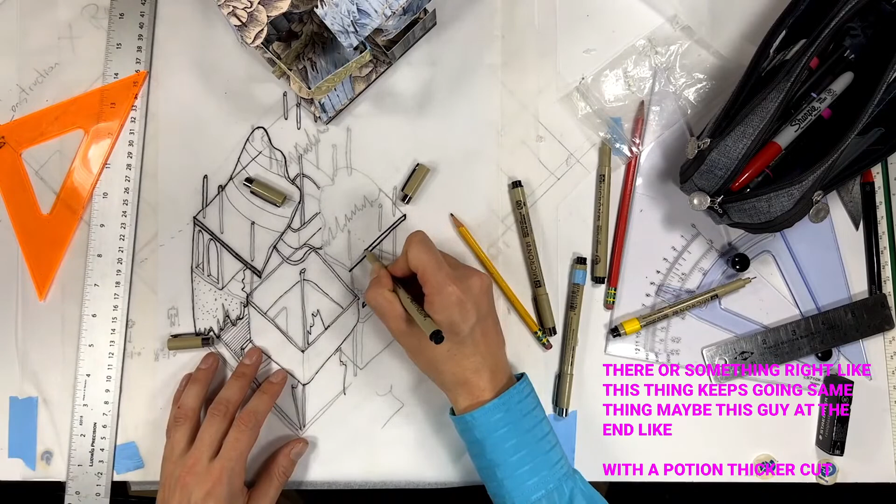So it's not going down so well. That will further accentuate that maybe this piece of paper keeps going. This one, I folded it, so maybe it stops right there. Right, this thing keeps going. Same thing, maybe this guy at the end is a thicker cut with a poché. Thicker cut. I'm exaggerating the line weights a little just so it's legible. And then come with your 0.5 to do this one because it's not being cut, we're just seeing the edge of it.

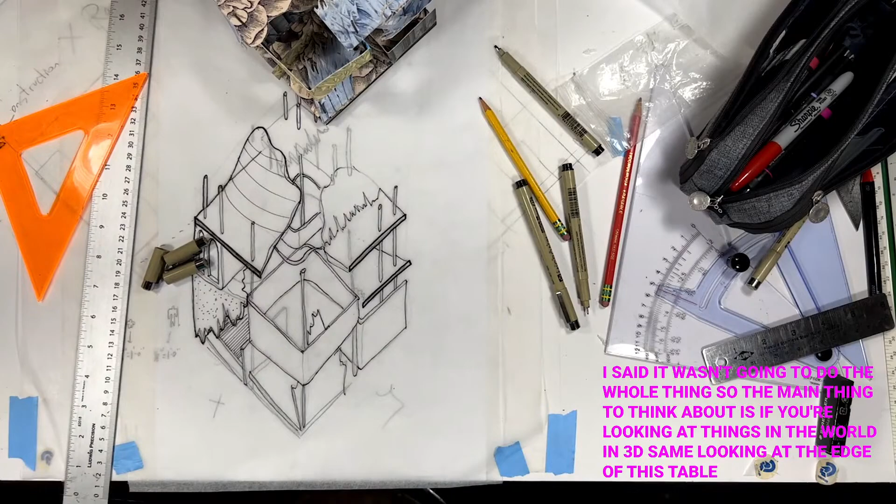I said I wasn't going to do the whole thing. So a main thing to think about is if you're looking at things in the world in 3D, say I'm looking at the edge of this table, or let's use something that folks can see. I'm looking at this box that's held up in space. When I draw this line here, I can see the two faces that it touches. Therefore, I'm going to make it a bit thinner. These two lines would be a bit thinner.

This line, this line, this line, this line, when I look at it, I can't see the other face. All I see is air, right? And so there's a difference between this face and say the table, which is what you could see. So I would make those lines thicker to accentuate the fact that there's air. Graphic novelists do this all the time to pull apart a drawing and make it seem more deep.

So with a 0.8 maybe, you can come in and outline things that are not touching. So inside of this box here, maybe it's the bottom edge. It's easy to get carried away with it, but it does help.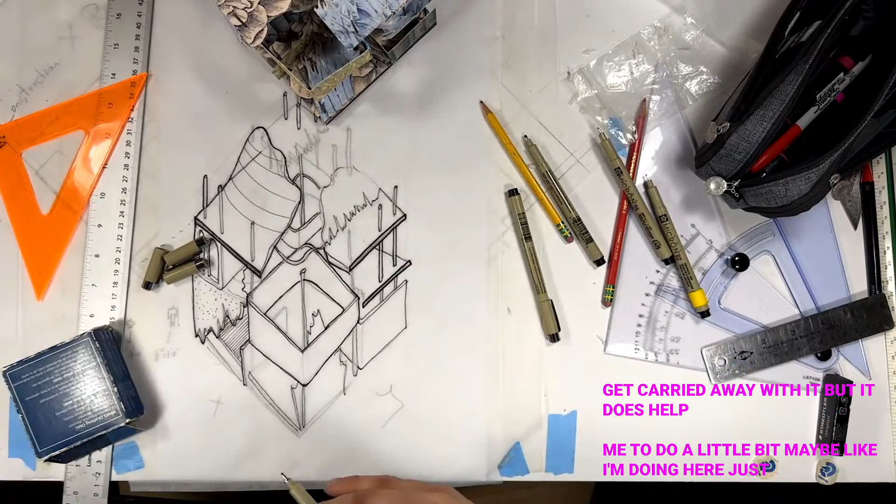The main thing would be to do a little bit, maybe like I'm doing here, just test it out, see how your line weights look, and then do a final one that's going to be more committed. But I would stick with like your 0.5, 0.4, something in the middle to do most of your lines. It's easier to add thickness than it is to remove thickness. Damn near impossible to remove thickness, short of Photoshop and redoing it.

Like maybe these wires are kind of thick at the top because they keep going. All right, and then all the other rules of texturing will apply if you want to. Some little vertical lines, maybe little vertical lines with some wiggles that maybe show it's wood boards or something. Little people. So what did I choose? I'll do an 1/8 inch.

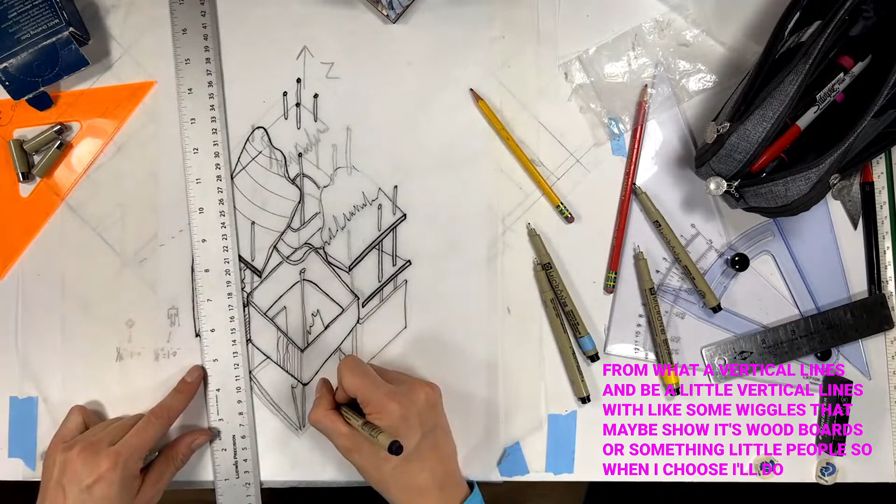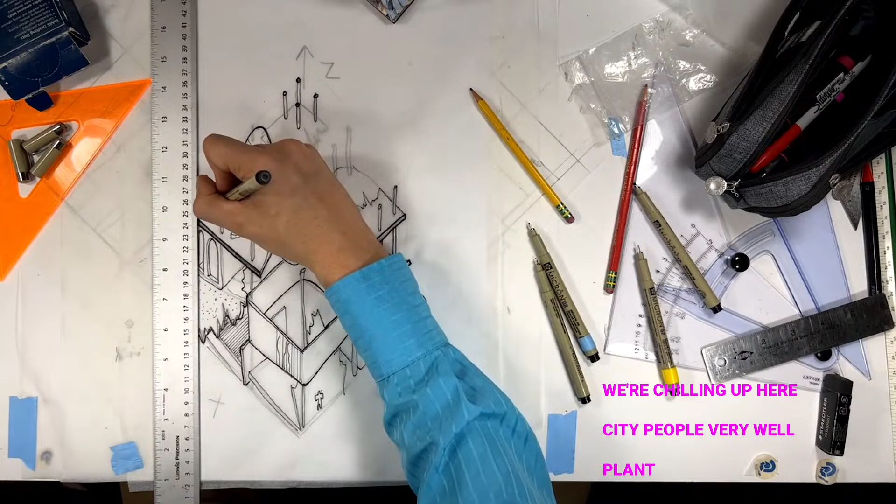The people are chilling up here. Can't draw city people very well. Big planters with some trees up there, going like some green roofs. Go ahead and draw one. Maybe on this surface, it's landscape, especially for you landscape architects amongst us, sustainable design students. Questions?

You could, yeah. So like this one that goes back there, maybe I draw a little dash line. The wire as it comes up, you know. So it should be like a last step. Yeah, and do it like really thin line weight. So when you do dash lines, maybe it goes from solid to dash, but also from medium to thin, or from thin to extra thin.

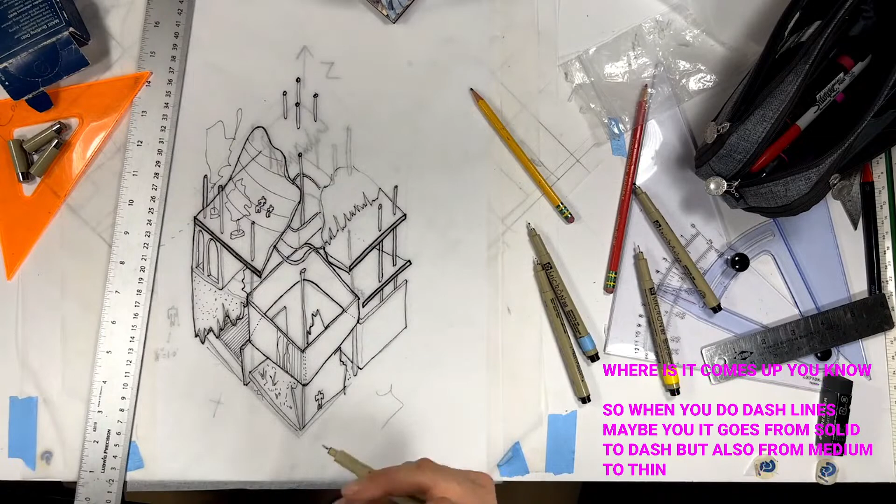As you guys are learning, the more contrast we have in the drawing, the better. Obviously, if I drew every single line that was on this, the drawing's going to get really dense, and therefore it's going to get ugly and illegible. We are trying to make beautiful drawings that people can read and understand. So you guys have to use your intuition at some point to say, I'm going to stop, or I'm not going to draw everything in here. There's only so much real estate, and if you're adding pen, eventually it'll turn black.

Yeah. What time is it? 10:30? An hour? It's pretty good. A little bit less than an hour. Any questions? Any things I can clarify? Make sense? Cool. That's good.

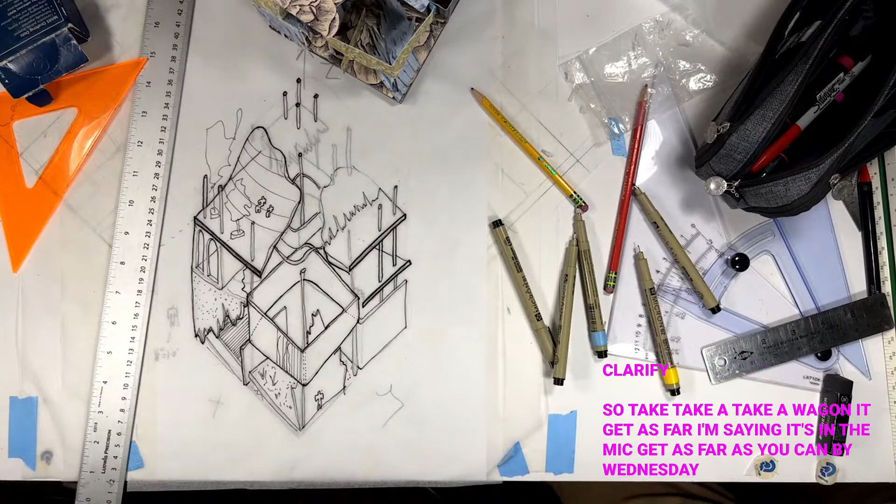So take a whack at it. Get as far, I'm saying this in a mic, get as far as you can by Wednesday for the midterm. I would love to see a version of this, maybe a pencil drawing of one of your models for the midterm, like an attempt at it. I know maybe the stress is starting to get high to produce everything for the midterm, so it's not required that you have an inked assignment 7 oblique for the midterm. It would be nice, but not required. Focus on finishing what you started. So the plans, the sections, and the models. Capiche? Cool. Thank you.

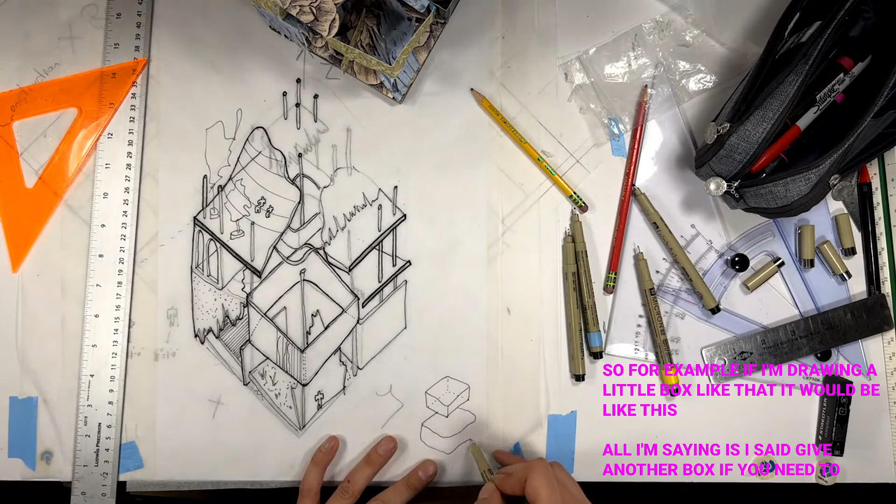Professor, for the part that I couldn't hear, where you talked about that. Look at the back of it, you cannot see the middle. Should I accentuate that part or make it more? So for example, if I'm drawing a little box like that, it would be like this. Right? With that. All I'm saying is, if you have another box, it's beneath it. If they're touching, you would maybe want your outline to go all the way around. Only the touching? Because they're touching. So this face and that face, or all three of these faces are not coplanar, but near each other.

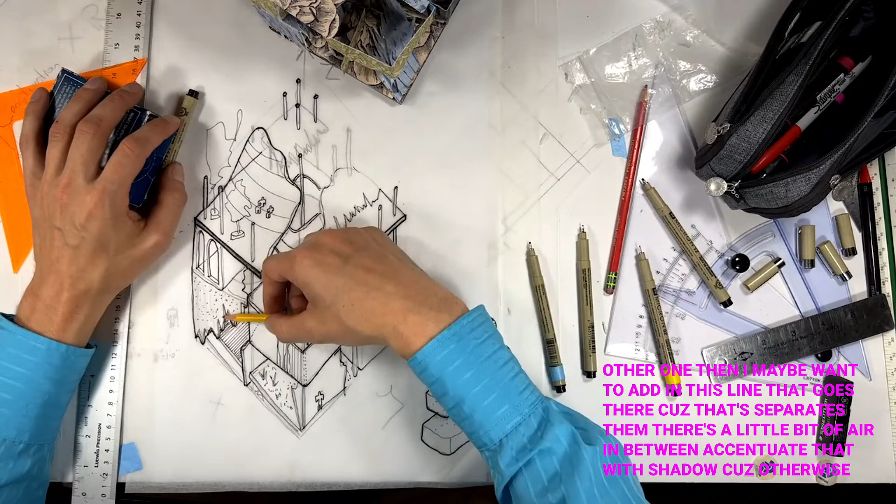Yeah. Right. If I lift this box away from the other one, then I maybe want to add in this line that goes there, because that separates them, makes them seem like there's a little bit of air in between, or you can accentuate that with shadow. There's other ways to do it. We didn't even talk about shadow on this thing, but you guys can use pencil on this to add tone and variety, in addition to the textures, or literally to show shadow.

And for this part, we don't need to really draw the line? No. I mean, there's maybe a ghosted box that this thing is inscribed inside, right? You don't need to draw that. That's the point of the wires. The wires, by having them in there, imply that there's a cube or a grid that we're working on. Okay, got it. Thank you. Clear enough? What are those 4 little bars you drew over here? These? Oh, these are the wires. Yeah, I didn't really finish this. Makes sense. Thank you.